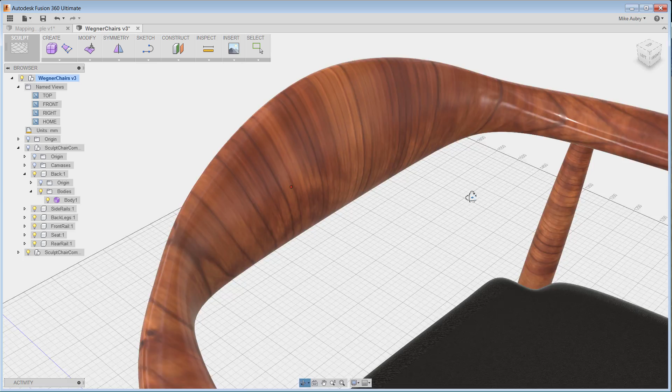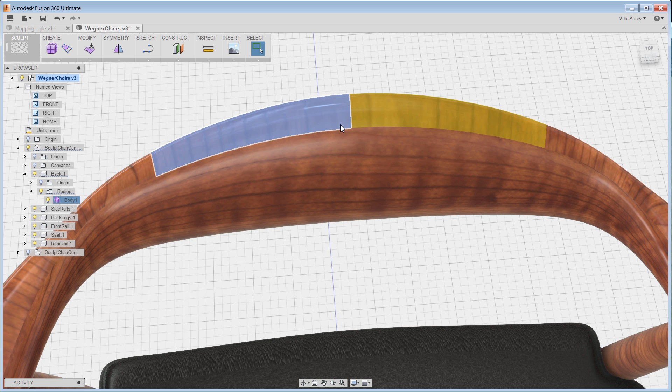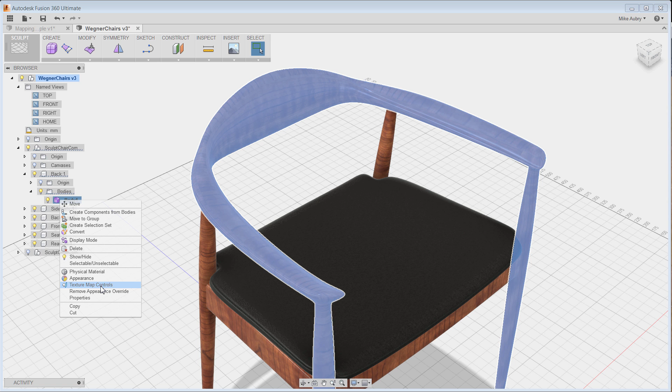And you see the difference. You can see that on the top here, these faces aren't really in line with this face, and as a result, it just doesn't look real. It doesn't look authentic. And the difference between the two is just a right click away. So on each body, if you just go and highlight that body here in the browser, right below the appearance, which is where you would apply wood, there is this second option called texture mapping.

And so what texture mapping allows you to do is you can take those textures and choose how they are mapped over that body. And so automatic does its best. You can see it's got some things right, some things wrong. But you have all these other options like planar, box, sphere. So you can choose basically the rough shape of what it resembles, and then it'll make it so that the material will be mapped over it like that.

So sphere is the one I chose here. Sphere and cylindrical usually make the most sense for these more organic-y shapes. So if I choose sphere, and then I give it an axis, imagine that this sphere is like a globe where it's got an axis that it's on. If you just choose, say, the red axis here, you can see now that along the edges that's the direction all the wood grains are being oriented along.

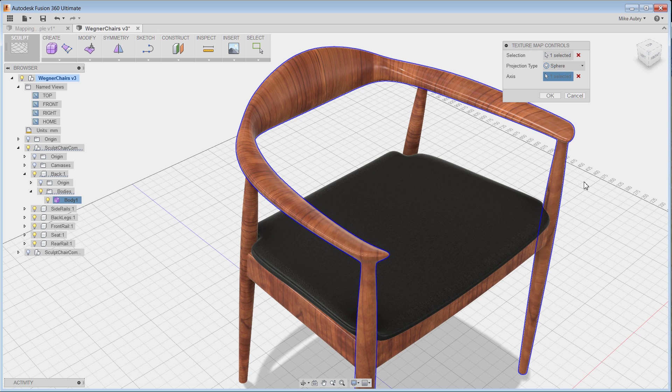If I choose the green axis right here, you can see now everything is moving up. And actually, I think that one looks the best, and that's the one I'm going to go with. So that's how you apply all these things, whether it be sphere, cylindrical, planar. Choose an edge or an axis along with the body, and that's how you will make it so that the materials look all the more authentic. So there we are. I think that looks like a pretty comfy chair.

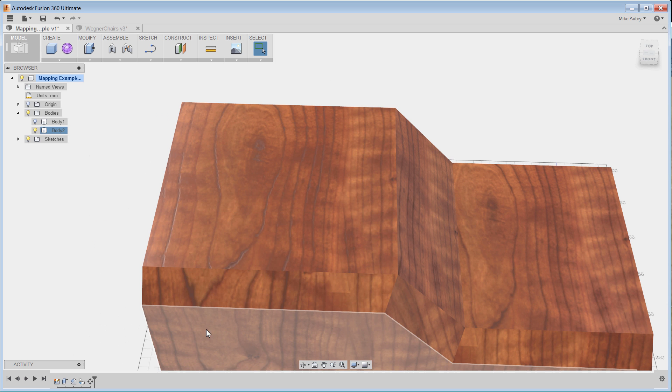Let me give you another example with a simpler one, a little less organic, just a wood block right here. So here's another good example where you can see where the knots are. They start lining up, and you can totally get them to line up. So here's a good look at what the finished product looks like.

And the way we're going to do this is actually through a mixture of both using the texture mapping controls and some advanced material edits. So just real quick, what you can see in this appearance is I have a series of different wooden materials that I've applied to this guy to make that happen. And let me show you how I did it.

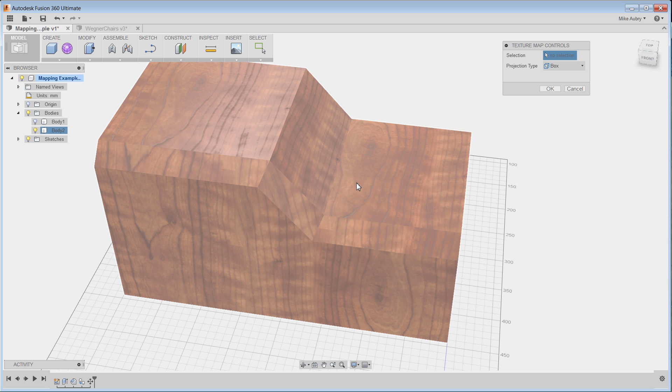I started off by going into my texture mapping controls to get enough of it in line that I could work with it. So actually this box, because it looks a lot like a box, is the one I chose. And if you actually choose it, you can kind of click on it a couple times and it'll give you a couple different options. And I like this one because you can see this face, this face, this face, and this face. These are all basically correct.

It's just these guys that I got to change. And that guy actually looks pretty good. I'm not even going to bother with him. But these two need to be changed to really look real. And so the next thing I'm going to do is I'm going to go back to my appearance, just right click, go to appearance, and then I'm going to take the material that was applied to it, and I'm going to duplicate it. So I'm going to just duplicate this guy, and then I'm going to apply that material rather than say to the whole body.

I'm going to apply it to the face. So this is going to be the face that I'm going to change first. And then I'm going to right click on it, I'm going to edit it. Now you got a couple different options here with scales, rotations, roughnesses, whatnots. The change I make with these types of situations, I'm just trying to clean up the mapping. I've found more often than not, actually, it's mostly just a rotational challenge.

So a lot of times, you can see as I rotate this thing, you see that knot that just got pulled around. Well, that's the same knot that's right here, and it's just an orientation thing. So if I go actually from 0 to 180, I can actually clean up a lot of these things really fast. So here I got this guy, and it's right where I need it to be. Now I just go and I just put it into the right place.

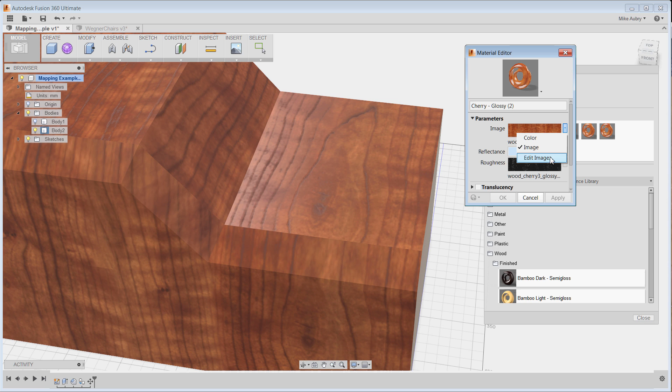So if I go to advanced, I can change the positional representation of this image that's being projected onto the face. Just by going edit image, and then you can see under your offset options here, I can start moving things into place. So I'll just kind of pick a spot. I'll just say like go one. See now it's moving down. I can go with my scroll wheel. I can do little micro adjustments. See how it just kind of baby steps.

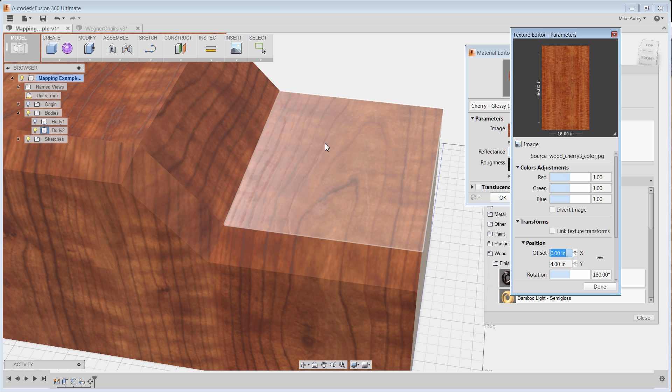I think that's too slow for here, so I'm going to say something maybe two. Let's go maybe four. Let's try that. Yeah, there we go. That looks good. We'll leave that guy into place. And so that's really all I'm doing here. So you can go and you just do it on the top one, and the same thing, and before you know it, you guys will have a really nice looking wooden part like that.

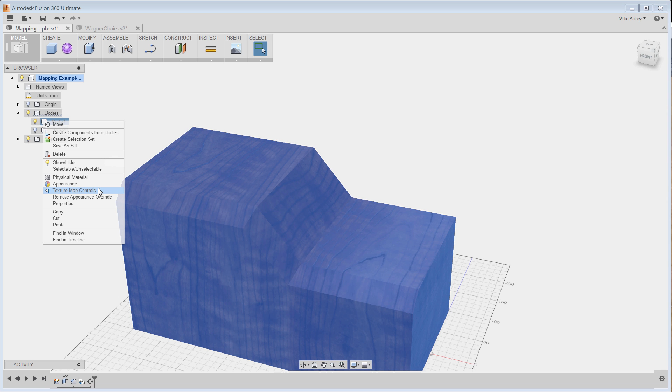So in conclusion, what we've looked at today is that we looked at being able to use the texture mapping controls to get things looking a little bit more continuous across different faces, and then we also used the appearances section to apply specific custom materials to specific faces that weren't quite lining up, and we changed around the offsets and the orientation to make it so they line up.